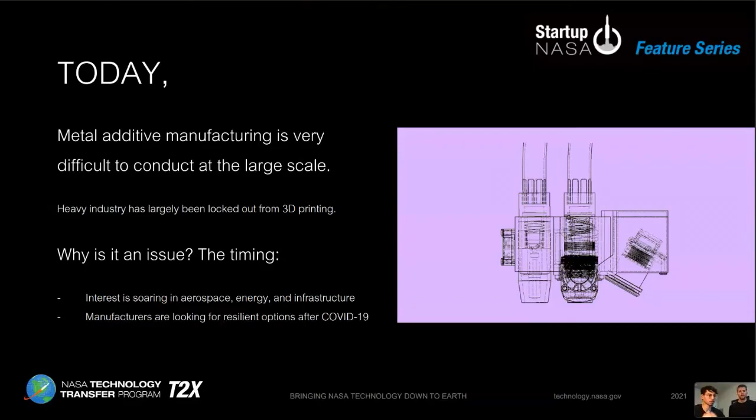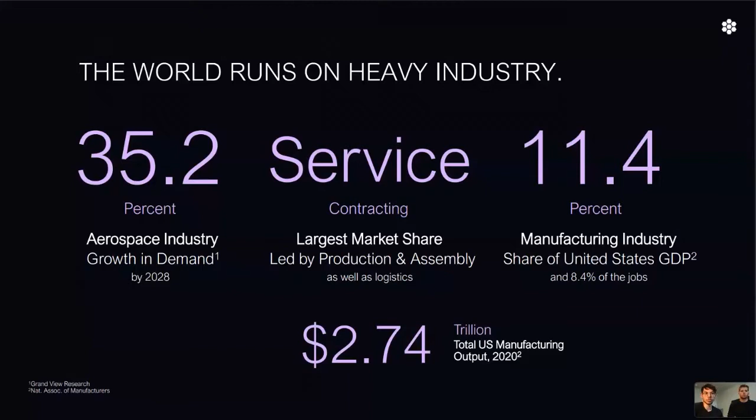So the thing about heavy industry is that it powers almost every industry. We're looking at an aerospace industry that is exploding right now. And not only that, the energy sector, the marine sector, all of these areas are touched by heavy industry in one way or another. Service contracting forms a lot of these industries, and a lot of that is based on the tool sets that we have and are able to use to actually manufacture at the large scale.

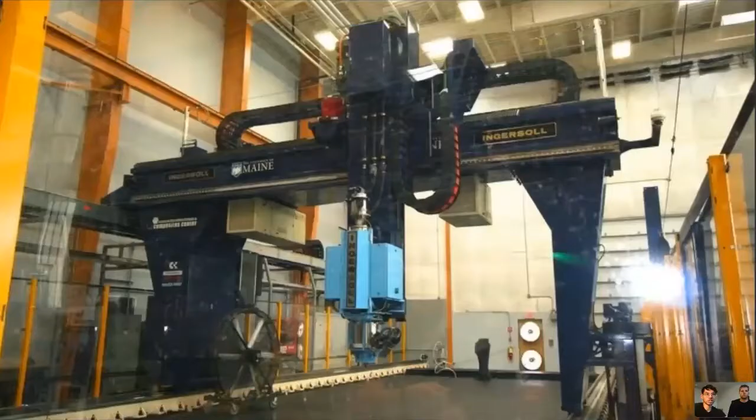So like Austin said, you really could go one of two ways here. You could build the largest 3D printer, or you could go the opposite direction and build the smallest 3D printer and mobilize that at scale. So around 2017...

we really started to look at the example of nature and how bees and ants work to produce. And the main difference you notice is that the process is distributed. It's not happening from one point source. So we started to ask ourselves, how do we make manufacturing possible from not one but multiple point sources?

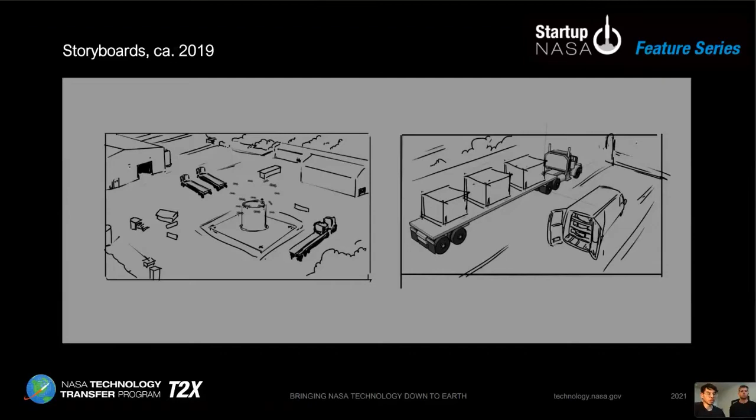And we drew up storyboards for that, what that could potentially look like. Yeah, you really start to break out the problem by distribution, and you can do things a lot quicker and a lot easier. So from there, we kind of grew it into a concept of sorts where...

you really want to go airborne. And you want to go airborne because of the verticality of that. Austin, you want to talk about that?

Sure. So kind of the idea is, okay, if we're not going to be moving a part inside of a printer anymore, then we got to move the printer around the part. So initially you can think about kind of grounded movement. Say, for example, you built some sort of a rover or a drone that had 3D printing capability on the ground. That could be good, but you really miss out on the verticality that some industries require, like energy with wind turbines or aerospace with kind of the shells of jets.

So the idea is that by distributing 3D printing and kind of incorporating swarm technology with the use of airborne drones, you could really get that verticality that would allow you to blow the door open in terms of large scale manufacturing. So before the drone as well, there's also the incorporation of a new type of printing we were looking at called rapid induction printing.

And this is really what's going to allow this type of manufacturing to happen. Because today, almost all 3D manufacturing is done with a laser. But there's a lot of problems with lasers. One of them just being they're inherently inefficient and they use an immense amount of energy and produce so much heat that the implementation of 3D printing is just difficult to begin with.

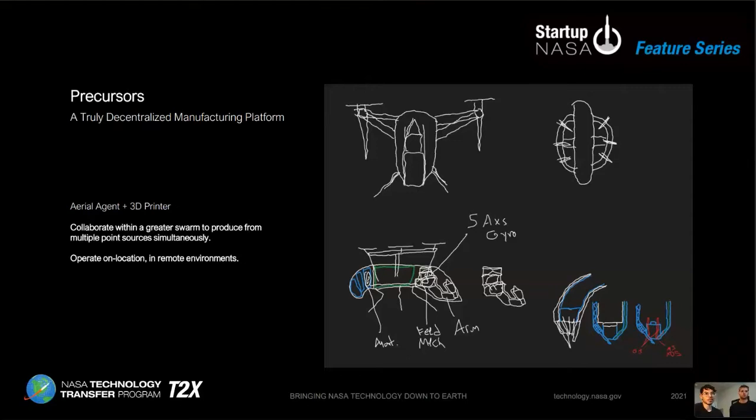From there, we really expanded the idea out to the point where the drones are not just deploying from a fixed system, but a mobile system, even a vehicle, and doing this kind of work out in the field. You want to be able to do this kind of work on location because it removes a lot of the hassle of transport and logistics that surround these industries.

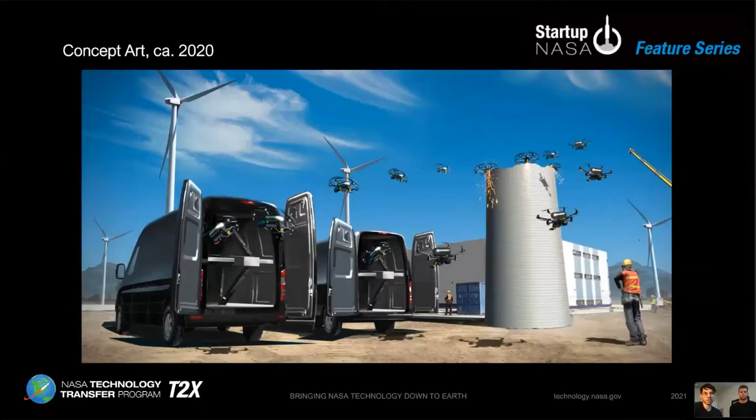So from that concept art, we were just sold on the idea that you want to be able to put this system in the air and distribute it and do it on location. This is a fundamental barrier to making this a reality that has to be solved. You have to take the system airborne.

And yeah, for that to happen, you needed several breakthroughs to occur. The first of which, you need very high energy efficiency on a process level. Like we said before, most of the metal additive industry right now is heavily reliant...

One of the great examples is exactly the fact that the industry relies predominantly on lasers, or even electron beams, which are very energy inefficient. You're looking at a significant amount of power wasted in just the use of a laser or electron beam. So in order to fix that problem, you need an entirely new approach to the metal additive idea. And not only that, you have to do it in a way that performance is not reduced in any such way. It has to be equal or better in performance than the traditional approach.

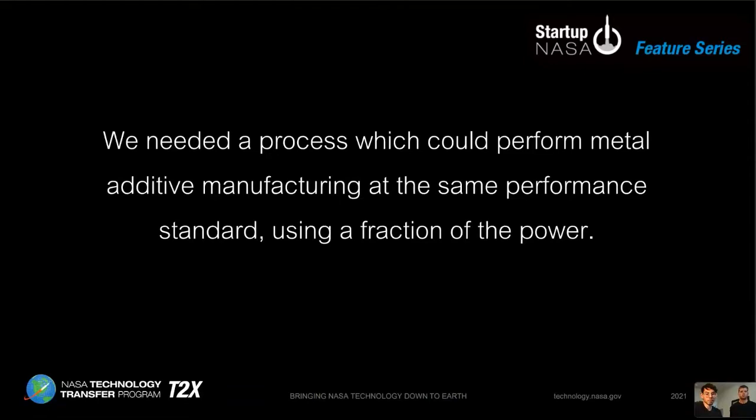In order for this to work, you need the drone to be very lightweight. And not only that, it has to be fully automated. So in order to make this work, we needed a new approach, a new process of metal additive that would deliver that same performance using a fraction of the power you would normally put in. So what we ended up doing was we invented an entirely new approach to metal additive manufacturing.

As you can see here, this is what we call rapid induction printing, which uses the process of induction versus a laser or electron beam. Now this does a ton of things that would really open a lot of doors, and most importantly, improving energy efficiency, material efficiency, even the amount of time it takes to manufacture. There's so many benefits that come from this process. It's almost shocking that this hasn't been tried yet.

And the best thing for us really is that this is going to work in open air, which is a big deal if you talk about manufacturing on site, especially if you're going to be close to residential areas, or in tighter spaces. The fact that we can work in open air really allows for implementation to be much less of a hassle than it is today. So a lot of companies that we've talked to have had a lot of frustrations when it comes to implementing 3D printers.

First of all, you have to have the space to implement it. And then from there, you have to have an immense amount of energy supply to power lasers and electron beams. And then finally, what we've heard is worst of all, you have to get all the heat out of there that you just built up. And so a lot of these companies end up spending so much time and money that can completely be avoided if you start using a new process, which we think is going to be rapid induction printing.

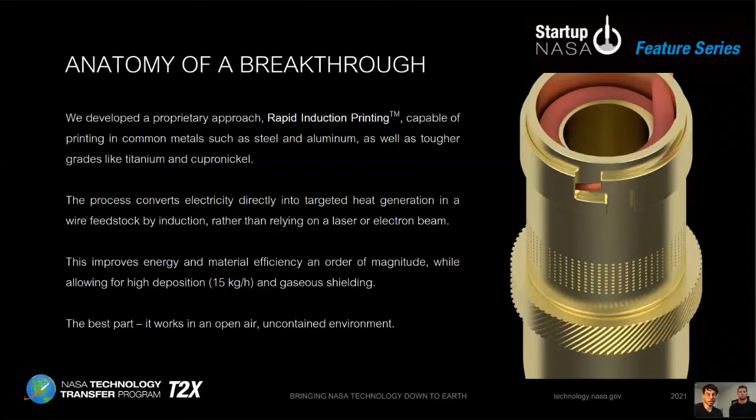You want to be able to eliminate the laser from the process and do that same process without sacrificing any of the quality. So in order to make that work, we turned to NASA's technology transfer program and found that being able to monitor that process while it's happening, and even correct mistakes as they are being made, that is everything in order to make this work. You need to be able to eliminate the need for post-processing. And we found NASA had developed several innovations in that space.

You want to be able to implement an approach that is not reliant on that same fundamental barrier, which is post-processing, if you want to do it on location. Stay on this for a second.

Another thing that a lot of people and companies we've talked to mentioned about frustrations with 3D printing is that they hate the fact that they can't tell if there's a problem happening until it's all said and done, and then they have to go and do an entirely new print. And if there's a way to monitor the quality as the print is being made, it would just be much better overall for obvious reasons.

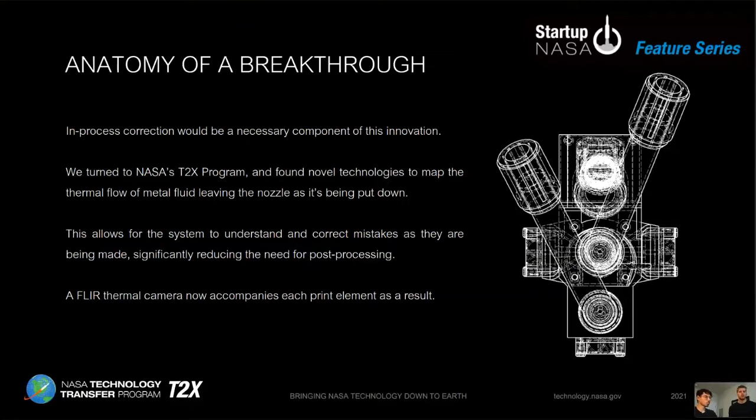In order to make this idea work of truly decentralized manufacturing, you need the two components we've discussed: the process innovation, which is rapid induction, and the drone. Being able to crack the process side first, we think was very important for the overall long-term vision. And obviously the next step would be the fully autonomous drone.

If we're talking milestones, the first one is obviously to nail down rapid induction, which is our new process. Because that alone is already going to be a big deal for additive manufacturing. So we're focusing on that first before we try to put anything in the air and create a drone, because that's a separate thing. But once we nail down that process, there's already so much you could do with it. Then the next step would be to develop our drone, put it together, and then you have a pretty amazing technology.

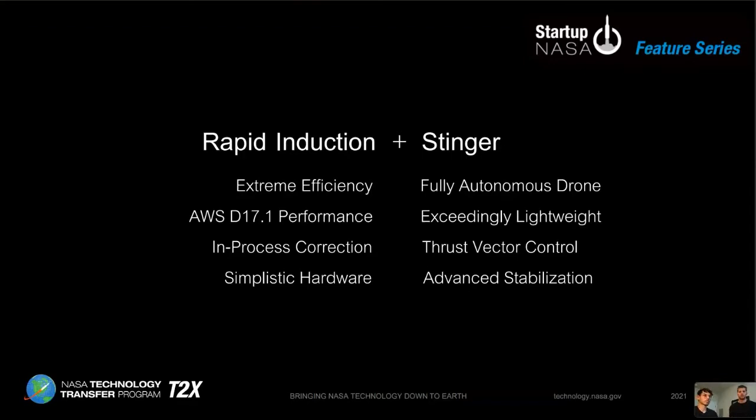Right now we are in the phase of developing that rapid induction process. In the coming months and quarters, we hope to be focusing more on the stinger, and then figuring out how to perfectly mend those together in a repeatable and effective process for all the industries that we've mentioned so far.

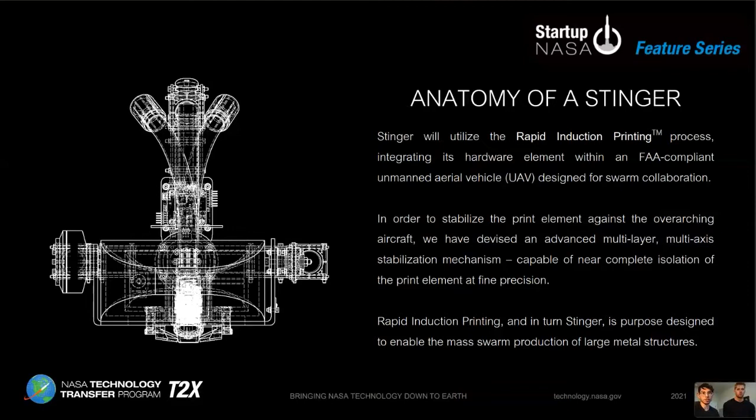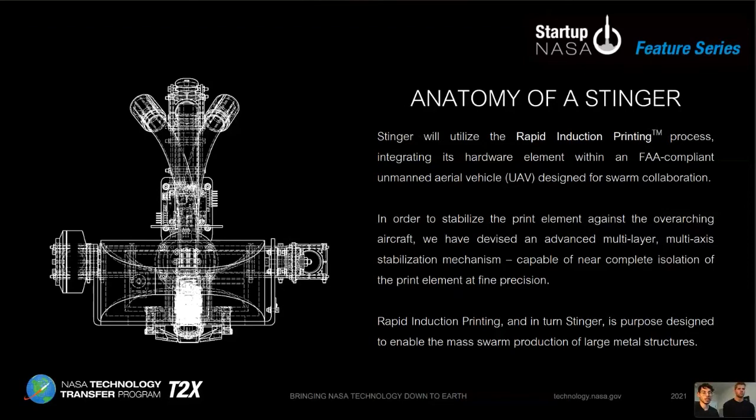You want to be able to not only integrate this into a drone, but do that in a way that is stable. So, okay, this is all great, but what has been proven now already?

One of the earliest things we wanted to answer was, could this be done from an entirely mobile, untethered platform? So the first thing we really sought out to solve is getting that onto a fully mobile platform.

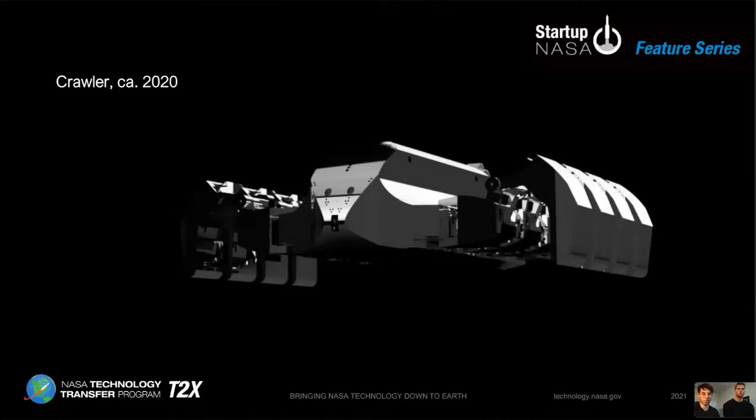So in 2020, we built a prototype modeled after a spider or a scorpion that we called Crawler. This was really about demonstrating performance metal 3D printing from an entirely mobile, self-contained platform.

We started with a ground prototype because if you crash an airborne prototype, it's just a mess and you lose all the money. But being able to bootstrap a ground prototype was really great for us because we could put concept to reality.

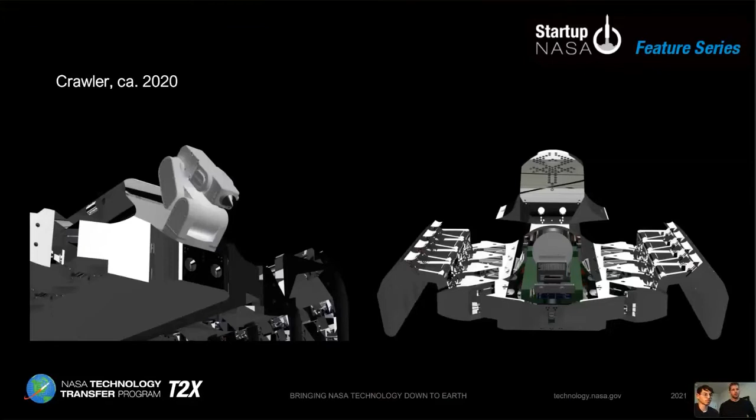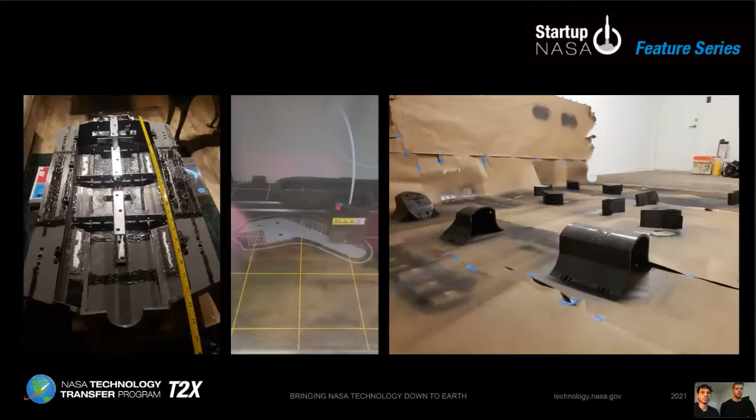Moving along from this, we went into the development of this with the bootstrap money that we had, and all the different components you can see were being developed here. Then you put all these together and start implementing some of the wiring technology.

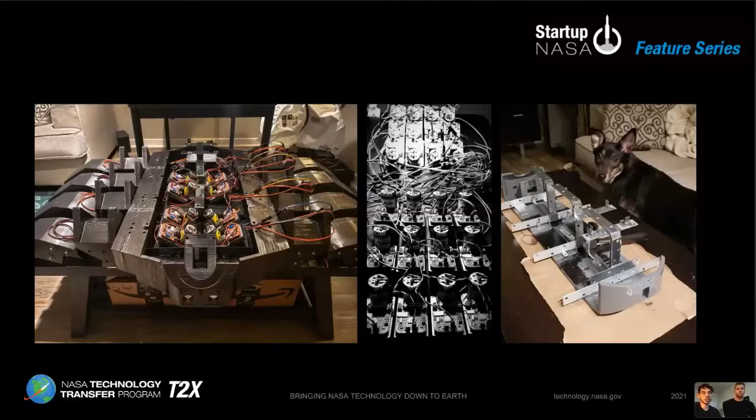We were able to get this done pretty capital efficiently and demonstrate that, to date, this is the only fully mechanized metal 3D printer that we know of. Not only that, it's able to do the same performance metal 3D printing that you'd come to expect from a multi-million-dollar machine.

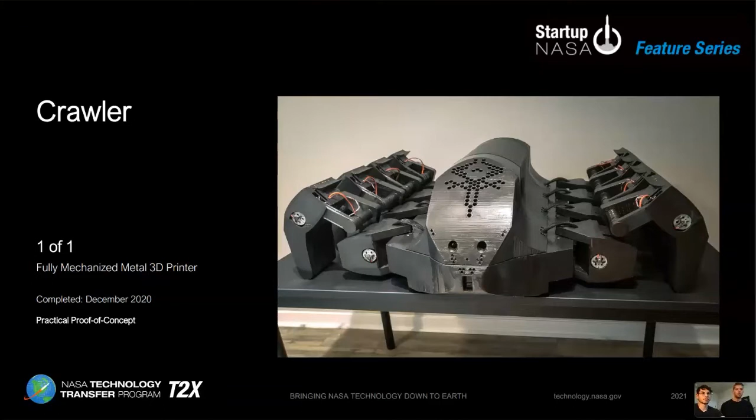What we decided here is that a ground prototype is great, but really the important structures are going to need that verticality. So it says one of one, and we intend it to be that way, unless there's a point where we think maybe rover, pretty small bots are important for getting into tight spaces of manufacturing. There's a bunch of different scenarios where you might need that, but as our primary focus we're looking at making that airborne technology possible. So that's kind of what we're headed to.

This machine was a fully autonomous, vision-based metal 3D printer that would maneuver around on its own power, its own cognition, and be able to conduct that process fully autonomously.

Not only that, in order to meet the performance standard, we designed it to integrate full-on localized shielding, which is standard in welding, with argon. So we integrated a full pressure vessel into it to get to that performance standard.

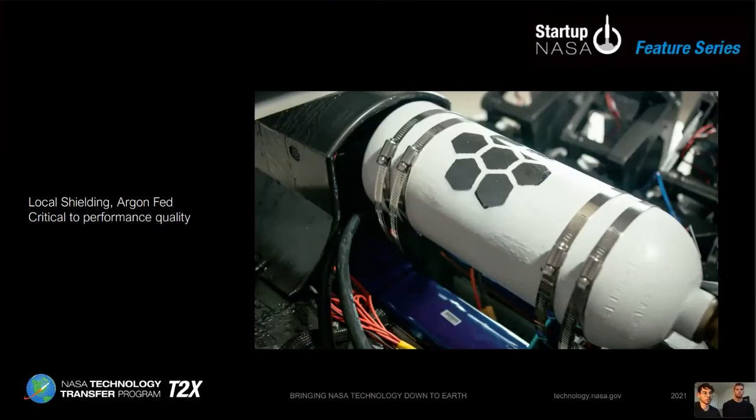Not only that, we 3D printed the entire structure. I mean, like the entire structure — the effort was completed in a matter of weeks rather than traditional months. Being able to demonstrate that fairly rapidly, accelerated with the technology transfer program, we think was a major milestone.

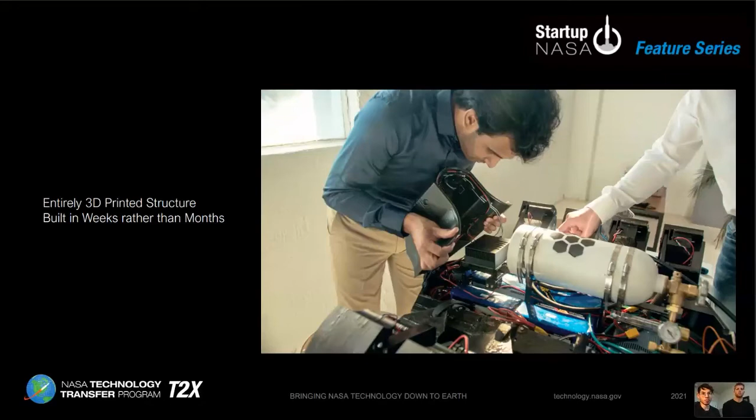But with that said, ultimately this approach on the ground, we knew, would eventually need to move into the air.

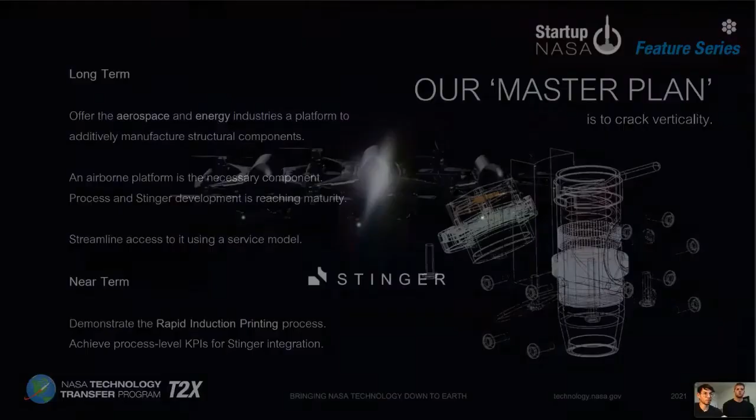So the next step would be what we're calling Stinger, a fully autonomous metal 3D printer on an airborne basis. Ultimately, that's important because you want to crack the verticality aspect and eventually offer industries like aerospace and energy a platform to 3D print very large structural components.

Not only that, we want to crack the problem of accessibility to this field, especially in terms of implementation. The cool idea we have is to offer our hardware as a service, because all the frustrations we've heard pretty much all come back to implementation. Quality is mainly good for the smaller parts, but the implementation is just such a turnoff for most people. If we're able to offer our hardware as a service, that whole implementation issue goes out the door.

Then along with that, the thing I get excited about as a supply chain guy is the ability to manufacture on site will really change a lot of things. I'm sure a lot of you watching this have seen how wind turbines have to be transported across the country, with their own specialized vehicles to stretch around lights. It's just ridiculous. And I'm sure you've seen videos of space shuttles going down the street, with all these cars backed up. Point is, for a lot of your massive metal structures, the logistics are just a nightmare.

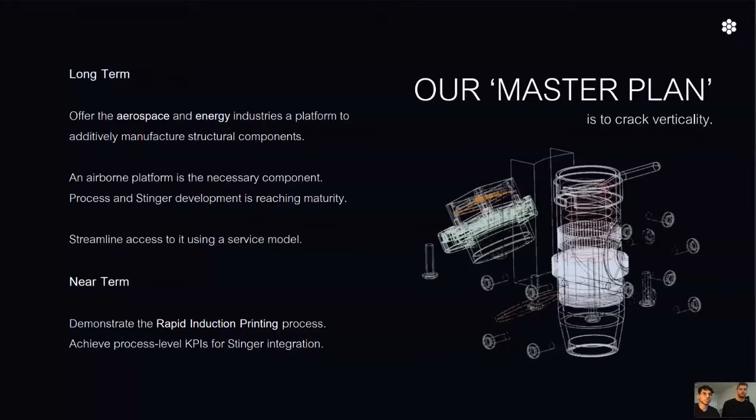So at this stage, we are fairly mature through R&D and development of the process. The next step would be a practical demonstration, and we're going to be doing that at aerospace scale with aerospace parts.

As far as our needs as entrepreneurs, really we're at the investment stage. We have all of our designs ready, everything is set and ready to go, but now it's just the capital behind really putting this thing to the test and proving out that process first.

That's the thing we're focusing on if we're talking milestones. From that point, through our first milestone of getting the process proven, that's going to open the door for us to be able to go into things like the drone, and the capital will be there to do that. So as far as immediate needs, we're looking for partners to help us get through that first milestone, whether that is investors or partners of support. Anything in that nature is exactly what we're here for at this point in time.